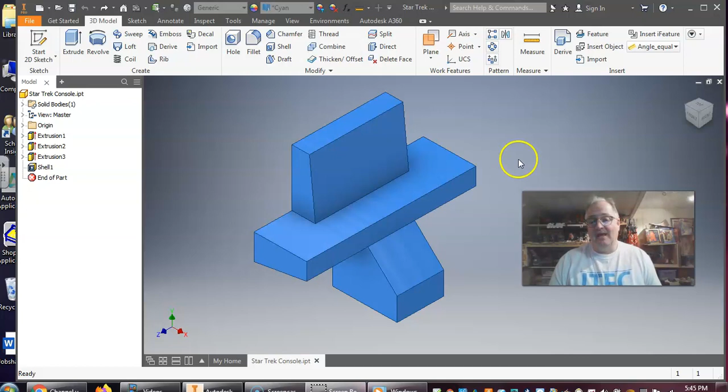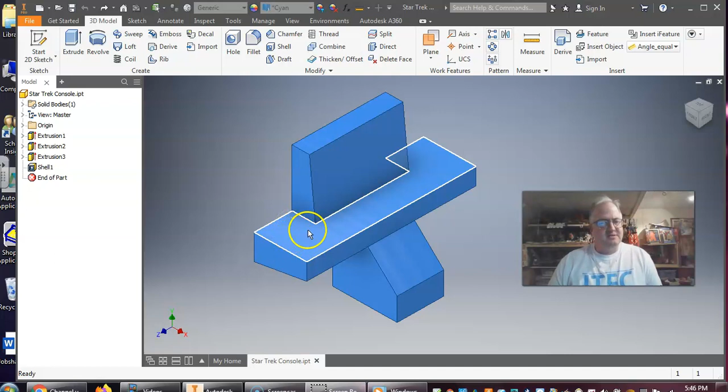So as we look at this console, I'm going to start putting a sketch on this surface here. This surface would act as the keyboard or the console, where all the bells and buttons and whistles that Sulu and Chekov would have been controlling to fly the Enterprise spaceship. So I'll start that sketch on that particular work surface.

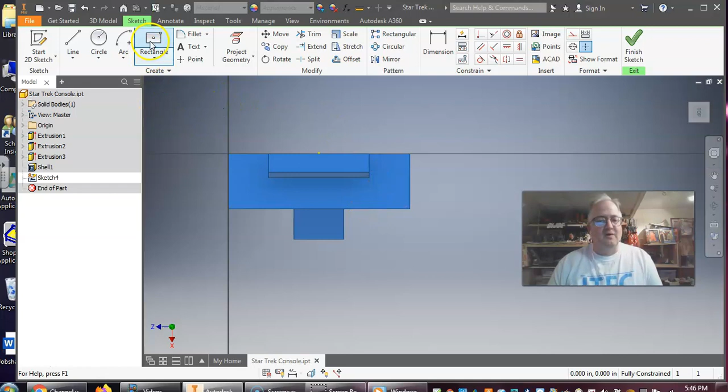And I'm just going to start by creating some buttons for Sulu. I'll place them over on the right side - I think that was Sulu, but I don't recall off the top of my head whether that was Sulu or Chekov's workstation. So I'm just going to come in here, and this is going to be an eighth of an inch by an eighth of an inch square. Yep, and I already kind of messed that up, so not a big deal.

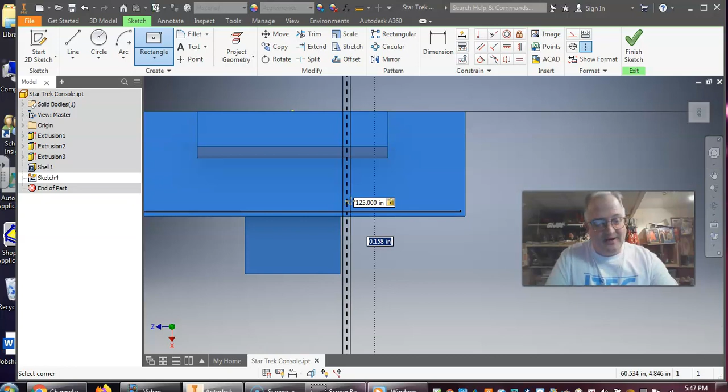So let's just enter these - oh, my numbers lock is off. There you go. So I made that 125, so let's change it to 0.125 by 0.125 instead of 125. There we go, now I'm back on track.

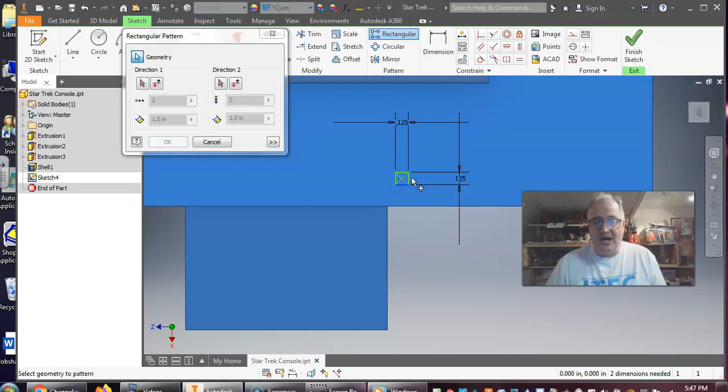So that is my first button here. Now I'm going to create a rectangular pattern on this. The first thing it wants is the geometry I want to pattern, so I'll select those 4 edges for that square. And I've got to give it a direction. So direction 1 is going to go here in the z-axis. Let me flip the direction because I want it to go that way.

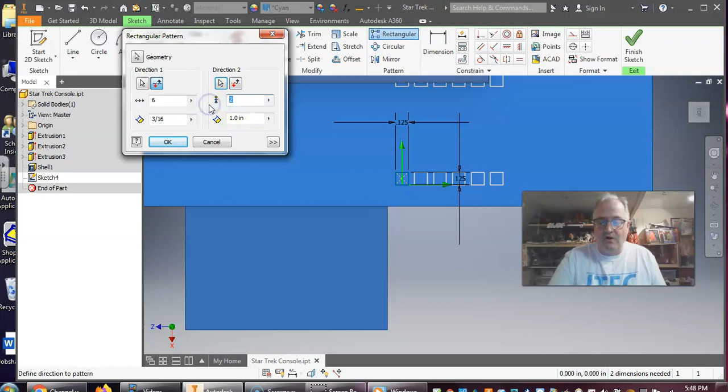Notice this is giving me 2 of these buttons spaced 1 inch apart, but I actually want 6 of these buttons, and I'm going to place these 5/16 of an inch apart. That's a little too much, let's make it 3/16 of an inch. There we go. And I also want them to go up, I'll do 4 going this direction, we'll do the same spacing, 3/16.

So there we go, click OK, and I'm going to finish this sketch. So there's where those buttons are going to be. Now if I were really designing this, I would also add some dimensional constraints so I could really position these buttons exactly where I want them to fit on there.

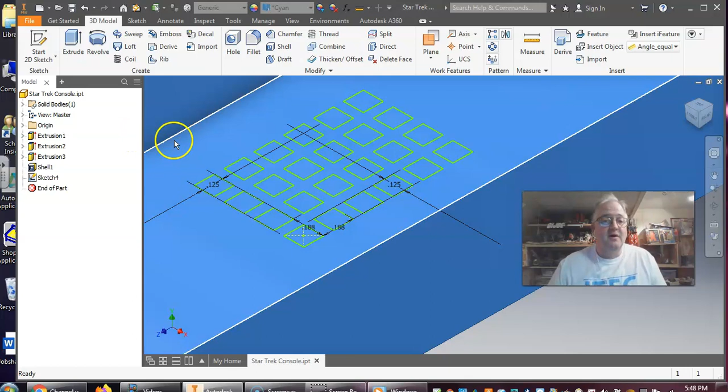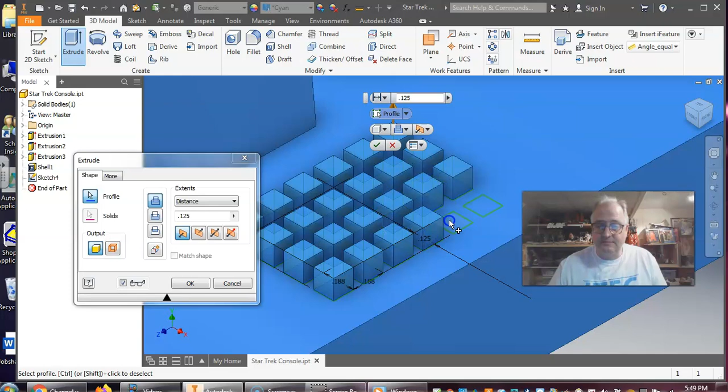But right now I'm just going to come in here and we'll extrude. So, alright, these are all those buttons - notice they're now coming up and projecting out of that console by 1/8 of an inch, and I could set that to whatever I wanted. I just have to go and click each of those for the sketching. There we go, hit OK.

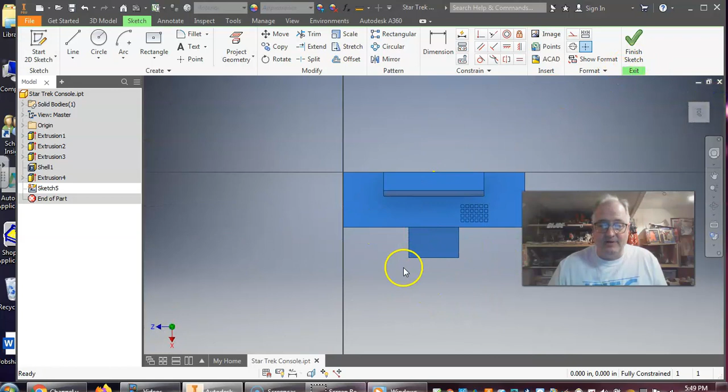And now I have those buttons for Sulu or Chekov, whoever sits at that particular workstation. Now that is the square buttons. I'm going to come over and start another sketch here, but I'm going to put it on the other side of the workstation, and in this case I'm going to do some circles here - we'll make these circular buttons.

I'll do the same type of pattern here. Now, I did forget one thing - because this is a circle and I'm sketching on a different sketch, I need some straight edges so I can position that particular pattern. So I need to come back here and project some geometry just to have something to go off of before I do this pattern.

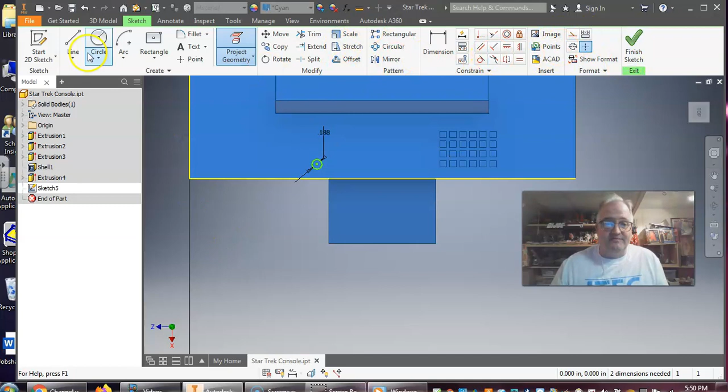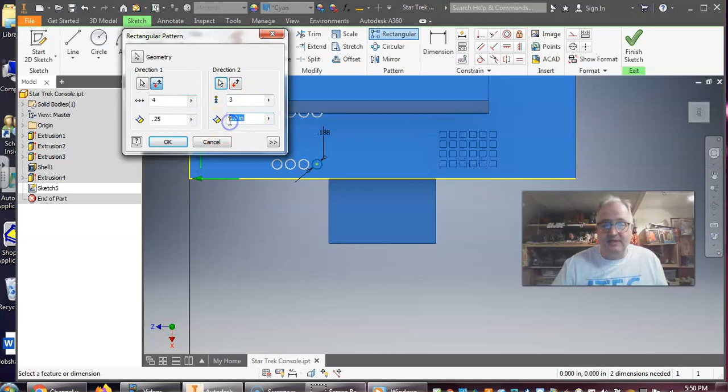So, rectangular pattern, this is the hole. I'm going to go this direction - I just switched that. We'll go 1/4 inch apart on these, and I'm only going to do a 4x3 pattern here. Going up that way, do 3, and this will be 1/4 of an inch. Alright, finish this sketch off.

And again, I will extrude these up.

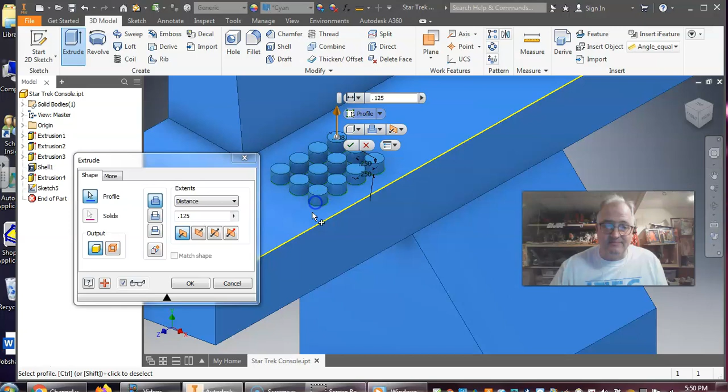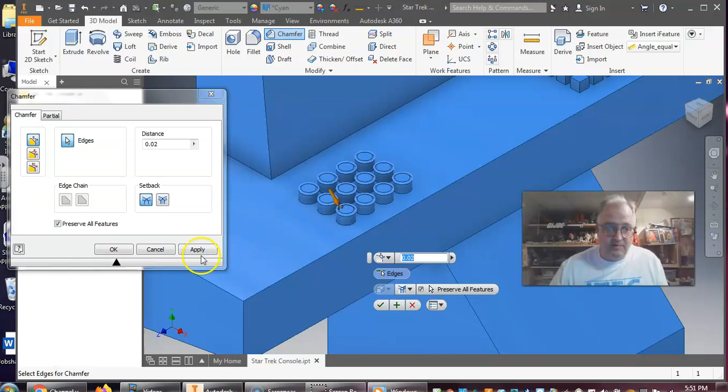I'm going to do something else with these just to soften them so they're not quite so harsh. I'll go back and add a little chamfer - in this case a 20 thousandths chamfer - on each of these to bring that in and make it a little softer so it doesn't look so sharp. It looks a little more like a button now. As I zoom in, you can see how I've added that chamfer. So there we go, that is that.

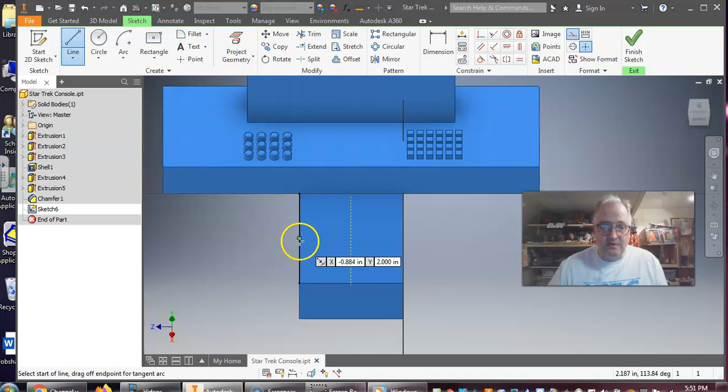So, let's say I want to create a globe of some sort. On this surface, I'm going to create some lines, but I want these to be construction lines. I'll click up here and go off of these midpoints. These are construction lines because I want to basically place this right on the center.

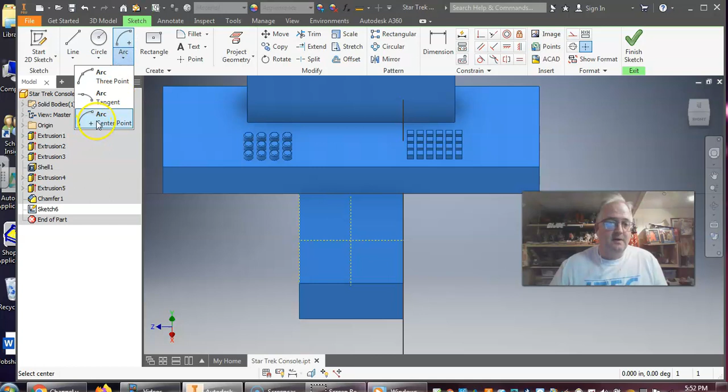Okay, turn my construction lines off, and now I'll do an arc - the center point arc. So this is going to be my center. If I go 3/8 here, that's going to give me 3/4 at 90 degrees, and I'll come back over to there. That gives me that arc, and I need a line here, and I'll show you why.

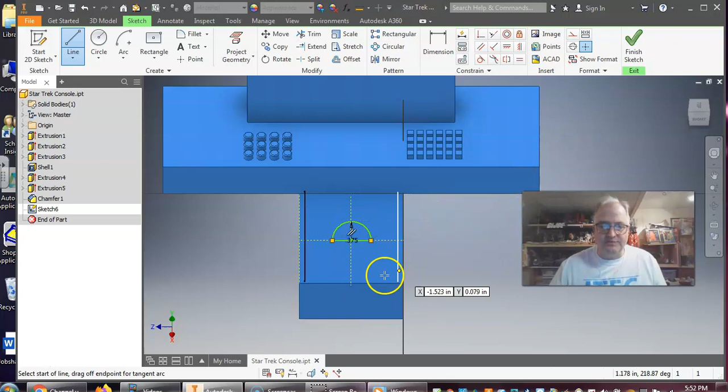I'm going to revolve this sketch to create that globe. Right now I have this half arc that's closed off, and I can tell it's closed because of the green color. I'm going to do a rotation around this to create that shape. Let me finish this sketch, and we'll use the 3D Revolve model tool.

It's already picking up on that - that is the axis I want. Now it's given me a full axis here, but we can just go to next, so that way it'll only be 180 degrees and won't poke through on the backside. I'll hit OK, and there we go.

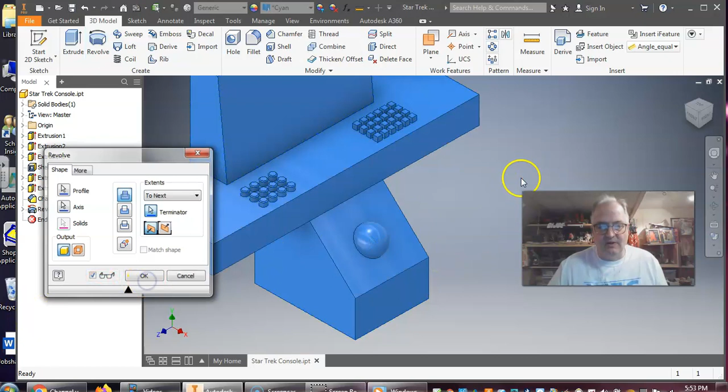Now you can see I have that model here, and I have that like a little type of globe on there. You know what, I want to make that a little bigger, so let me come back in here.

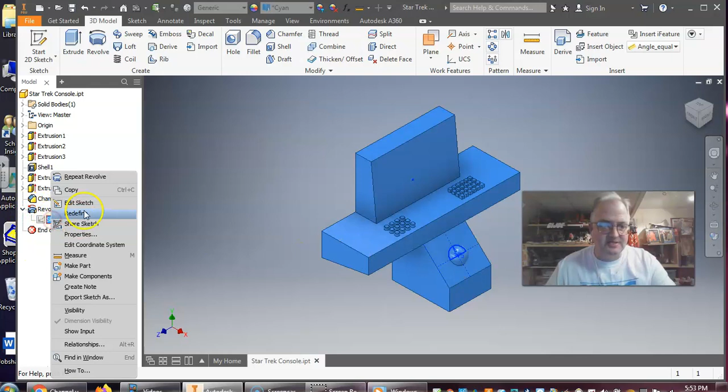I'm going to change this sketch just a little bit. Instead of that being 0.375, I'm going to make this half an inch for 1 inch instead, just to change it. There we go, that's a little better.

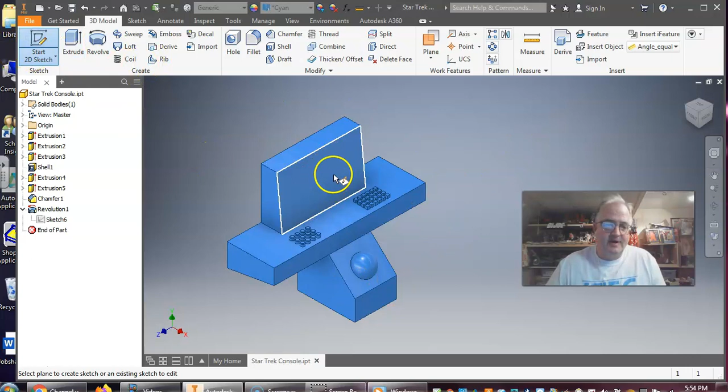Alright, same type of thing on there - I can go in here and add buttons up there. In this case I'm going to come right up here, and we'll create a little TV screen, a little monitoring station.

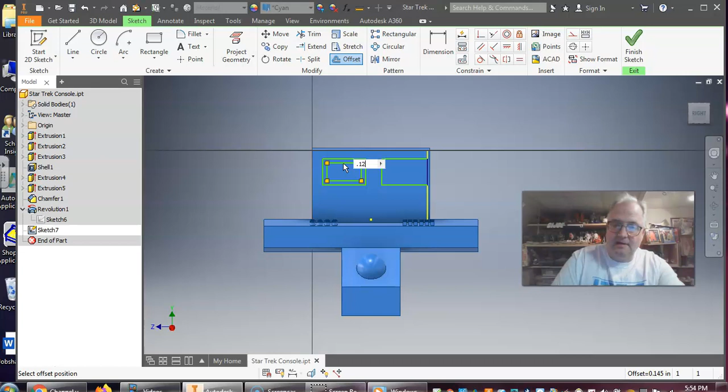Get in here - place one there, place one here. So then we'll go ahead and offset this one by 1/8, do the same thing on this one. There we go, finish that sketch.

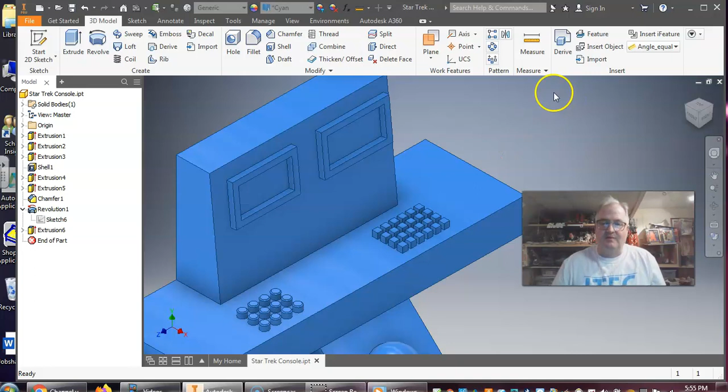Now I'm going to extrude both of these - that and that. There we go, and that gives me some little computer monitoring stations so you can see how that is.

Now again, I can go in and dimensionally constrain this so they are placed in the right spot. To do that, I have to come back into my sketch, and we will dimension from here to there, and make that 0.3125, 5/16.

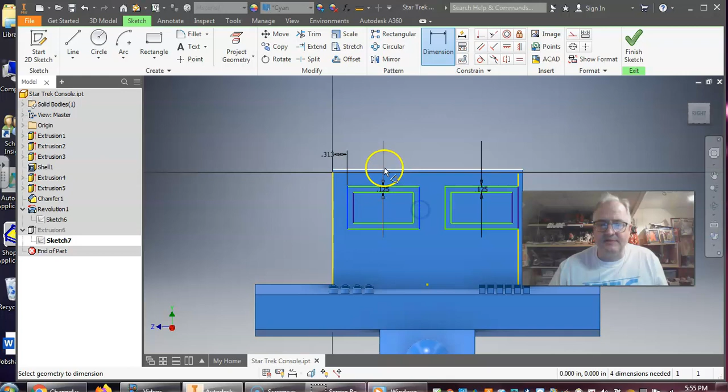I'm going to do the same thing here - we want this to be 1.5. And from here to there will also be...

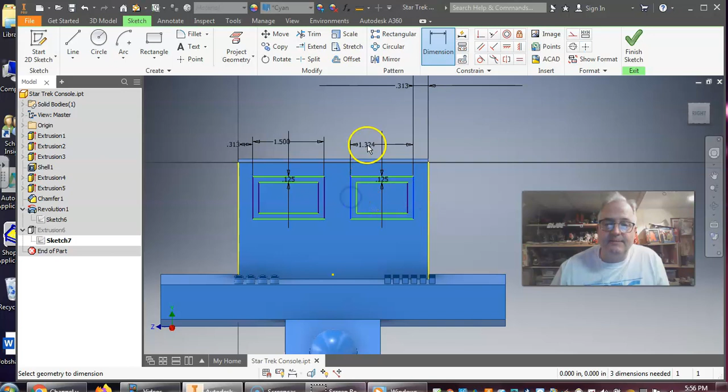Over constrained - it must be locked in. Yep, that it is, so I've got to delete that out. Now I can dimension that - this is going to be 0.3125. And again, this dimension here, 1.5.

Alright, now we're fully constrained - you'll see it all moves over. It looks more symmetrical, and I've got my computer console with a bit more updated, realistic look to it.

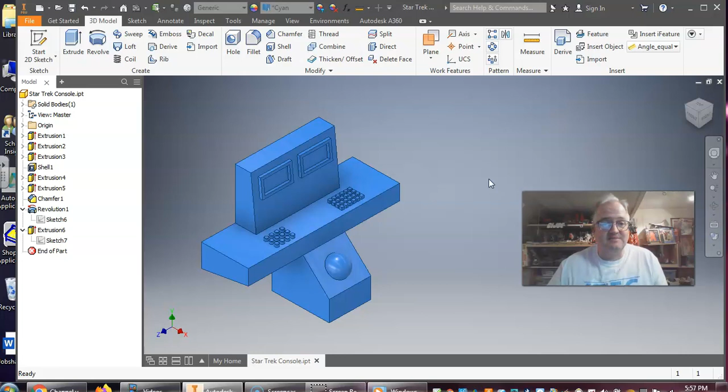Again, I can add all sorts of other things in here, place other stuff if I want to - just a matter of taking the time to create all this. Like I said, this is one of those ways that it makes these things so much more impressive with what you can do to it.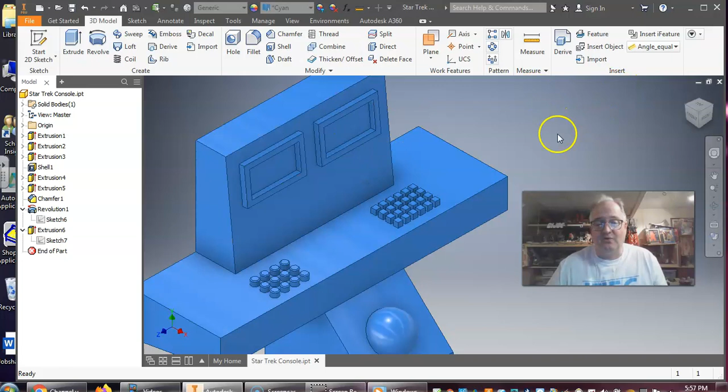So I could even go back and add a decal. I could take some original prints - this would just be an image, of course - but maybe put the away team picture on there and show them going in. Just different things you can do.

So anyway, that is a new, better, updated Star Trek Enterprise computer console here that I can then go and 3D print and make whatever size I want.